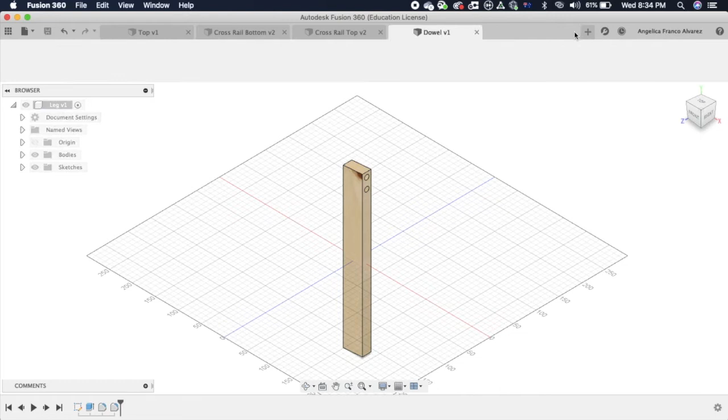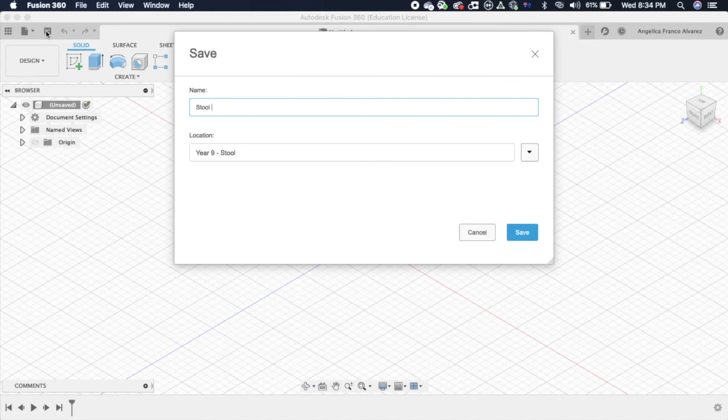Okay guys, so to do the assembly, I'm going to close all these projects that I had open, and start with a blank project. Before I even start drawing or doing anything, I'm going to save this with a new name. So, save, and this is going to be Stool Assembly, and then save.

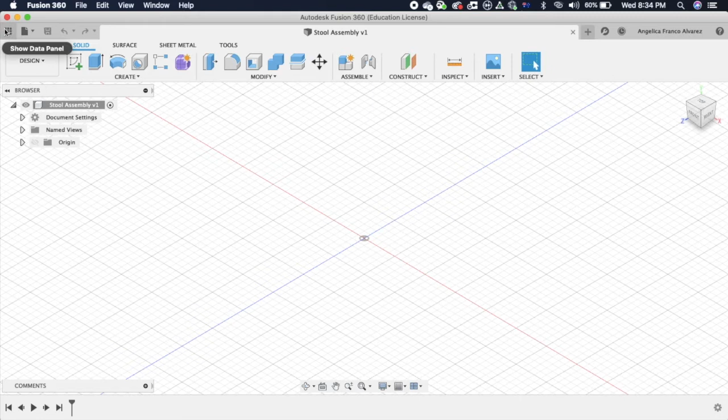I need to do this so I can start importing all the parts and conducting my assembly. If I don't name my document, it won't allow me to import the parts. So I'm going to go back to my data panel, which is behind this icon on the left top corner. Click on that icon and I can see my project, the Year 9 stool project, and all the parts that I have drawn inside that project together with my stool assembly drawing.

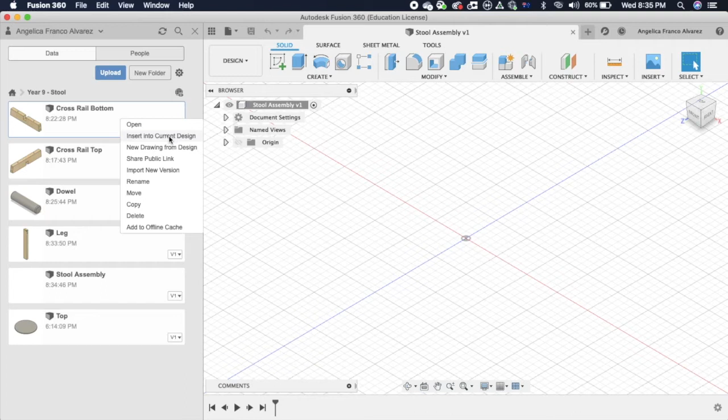So to start placing all the parts into my assembly, I'm going to hover over the first part, which is the cross rail bottom. I'm going to right click using 2 fingers on my trackpad, and insert into current design. What it does is it places this drawing into the document, and gives me all these arrows and angle handles, but I'm not going to move it. I'm just going to place it as it came, and hit OK.

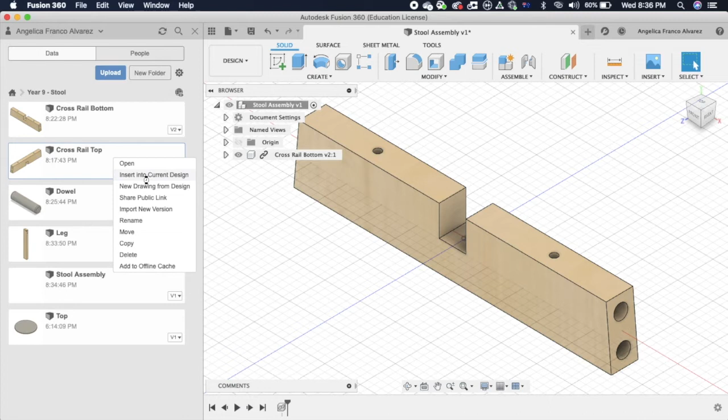Do the same process for the cross rail top. I'm going to click on the cross rail top with 2 fingers, insert into current design. If you're working with a mouse, that will be your right click. And then that brings in my cross rail top into the right position, so I don't need to move it or anything, and then I press OK.

So this is the importance of creating drawings starting from the middle and creating them with shapes that start from the middle and allow you to create a symmetrical drawing, because the more exact you do the drawing, the less you have to move it around once you place it.

Okay, so now we have placed this and this is going really well. I'm going to start importing my dowel. I'm going to right click on the dowel and then insert into current design.

I'm going to pull this dowel out of the way so I can see it better, and press OK. You can see that on each side I've got 2 perforations for dowels. That means that for each side I need 2, and in total I will need 8.

So I'm going to duplicate this dowel. I could still go and import them one by one, but since I have it already here, I'm just going to duplicate it. So I'm going to go into Modify, Move/Copy tool.

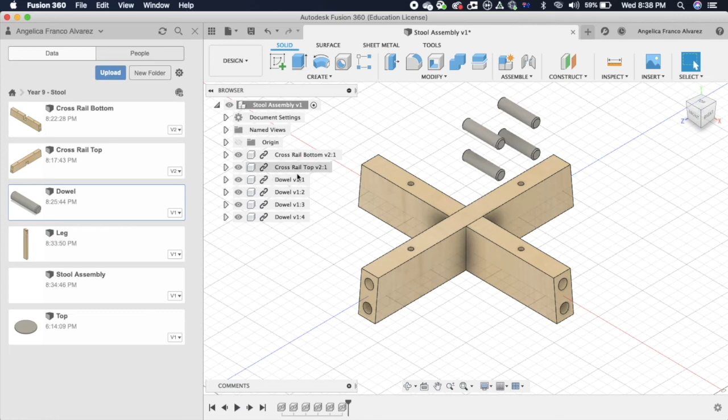So I've got now 4, and then OK. You can see that I'm starting to generate all these copies, and they appear here on the browser area. I'm going to do this again, go into Modify, Move/Copy, four of them, and I need another 4 for the 8.

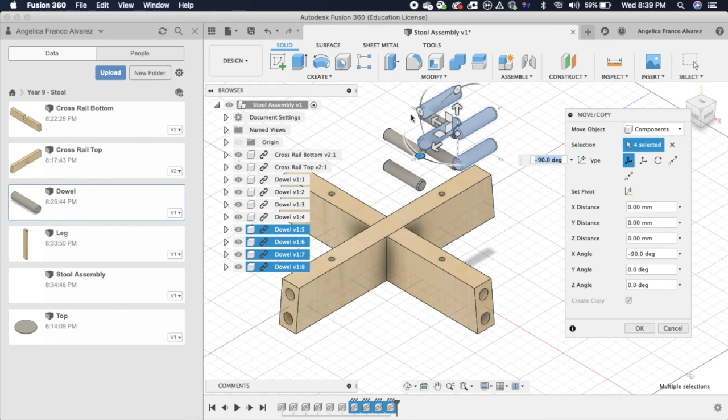So I'm going to create a copy, and this time I'm going to rotate them using these rotation handles. I'm going to move them this way, and rotate exactly 90 degrees. If you cannot get 90 degrees, just type it in as 90. You can do negative or positive 90, it doesn't really matter, it's the same. You can move them to the side so you can see things better, and then hit OK. So now you can see that in total I've got 8 dowels.

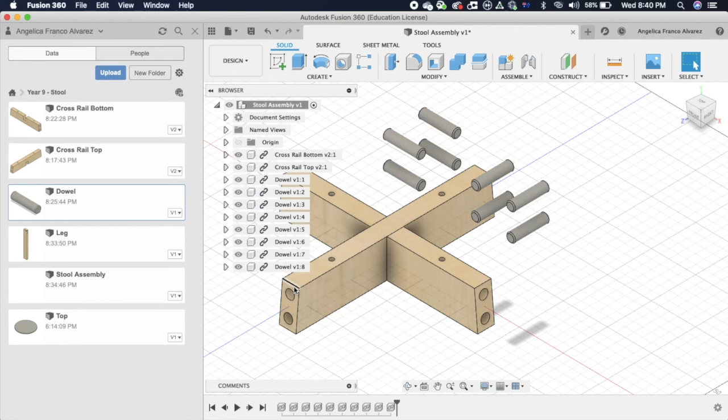So now what we're going to do is position these dowels into the cross rails.